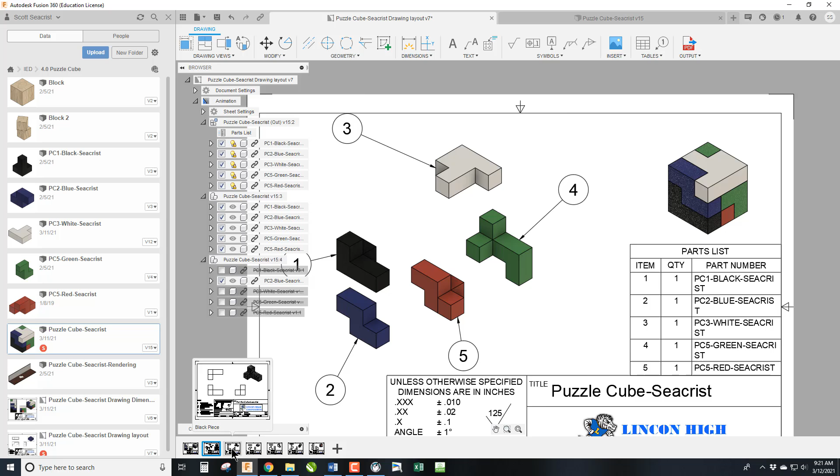Okay, welcome back. Today we're going to talk about how we take the assembled puzzle cube and lay out the drawings so that we can later dimension them. It's going to be epic. Stick around.

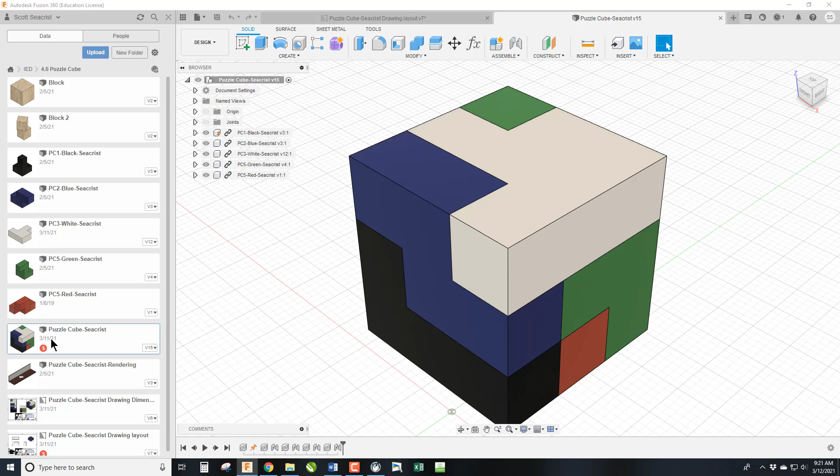Okay, we start with the model. First off, if we look at the data tree, you should have a puzzle cube assembled and a rendering one. You should not have multiple assembled puzzle cubes - if you do, delete them, but make sure you don't delete the one you did the animation in, since you'll need that. If you followed the animation tutorial, make sure you have a disassembly and an assembly video for when we use that in a drawing.

Hop back over to the design. We're going to create a drawing from design. We are going to choose a template, which in our case is the 8.5 by 11, and we'll click OK.

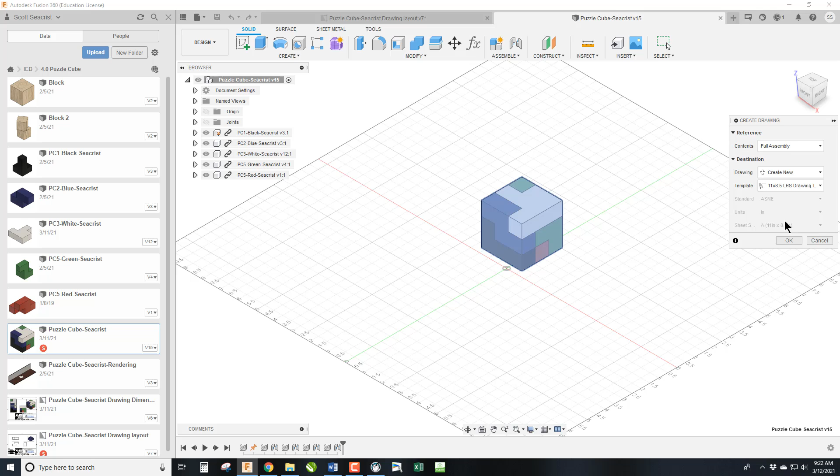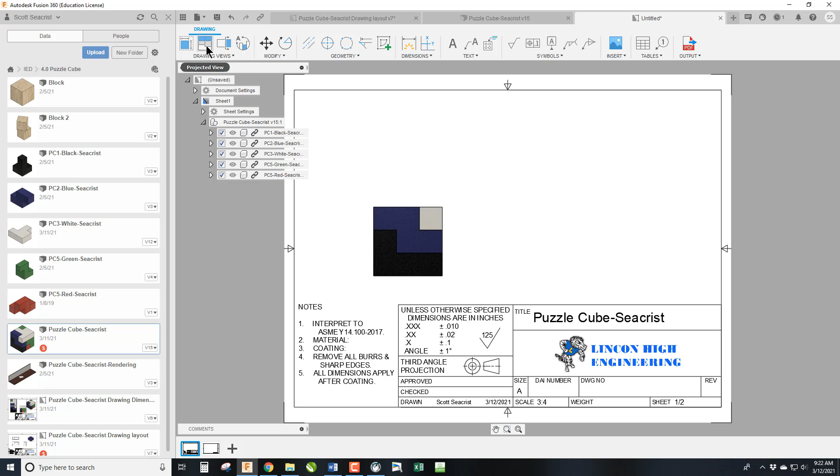We are going to first make sure this is colored. We're going to set the scale across all of this to 3/4 scale, so we have room for dimensions. We're going to place the front and click OK. We're then going to project the top, the right, and an isometric.

Now, the notes - we are going to need the notes in subsequent pages. If we delete them now, we'd have to rewrite them, so I wouldn't touch them.

Now we're going to jump over and fill out the title block. As always, make sure your caps lock is on. The code is IED for the class, so it's 200 for the puzzle cube, and since this is the first puzzle cube you've done, it's 1. If you did a super cube, this is where you'd put in 2. And then it is 00 because it's a cover page. Rev is the year, and this is the first version.

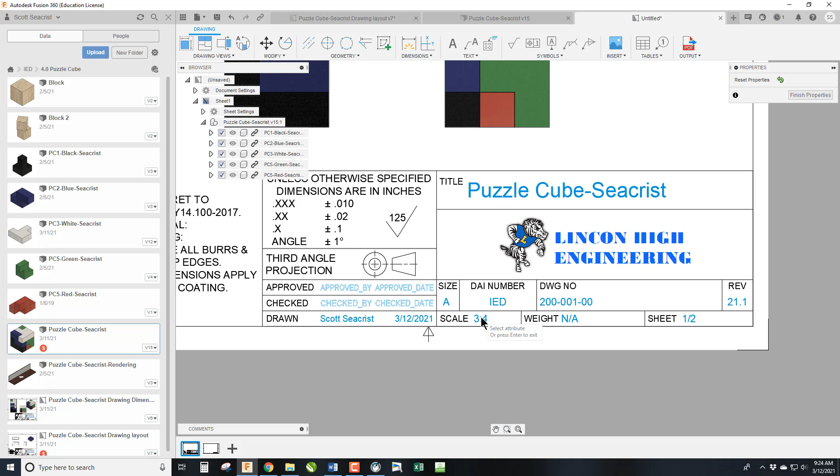We are going to leave the weight out because we don't need the weight of the assembly yet. And we have 3/4 scale. We are done for now with page 1.

So let's go next. Let's save it. We're going to call it Puzzle Cube Drawings Demo.

So we're going to hop back over to the assembly, and then switch to animation. The thing we want to make sure in animation is when it says top, front, right, that we have a view where we can see each piece clearly, not over the top of each other. If not, we could go down here and hit Edit Action and move them. That way, when we bring it into the drawing, this is the view we're going to get.

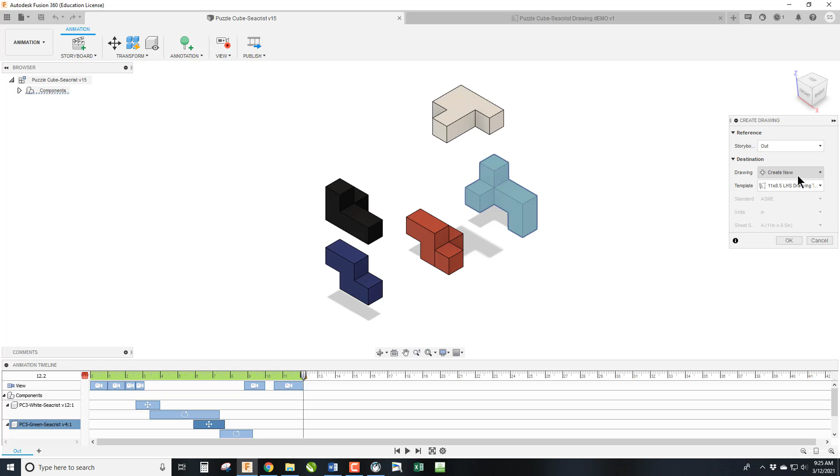So we're going to go to drawing from animation. We are now going to create it, put it on that demo drawing, and click OK. And we are then going to place that there.

Now I'm going to see if mine can get to 3:1 or 3/4 scale. Sometimes it can, sometimes it can't. I don't like that. I'm going to stick with half scale for this layout. So then we click OK. Oops, I should have turned on color before I clicked OK.

Now, the next thing we want to do is name our sheets. So we're going to call this sheet, by double-clicking on it, Animation. Hopefully I spelled that right. Nope, that doesn't look right. I don't think there's an extra A. Animation - there we go.

And we're going to label the first sheet, which we can do another way by right-clicking and saying rename. I'm going to call it Puzzle Cube. Now I have this sheet number 2, which I actually don't need, so I'm just going to hit delete.

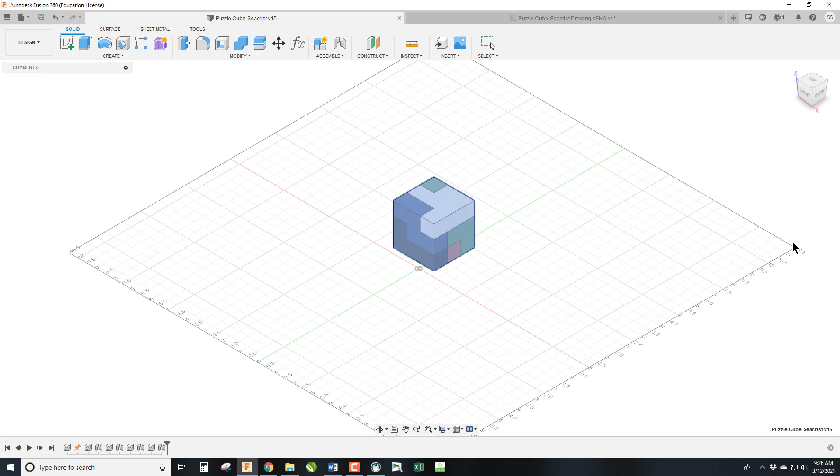So now I'm going to jump back over here. I'm going to go back into design, and then create a drawing from design. It is going to go onto this, but now we're going to put it on the animation sheet. So then we can choose the northwest quadrant, which is the same as the front right top.

And we can place an assembled cube in color here, so we have the disassembly and the assembly all visible. Now I've got to come down here and change this number to drawing number 1.

Finish. I don't need that notes on this one either. We'll need it on the next one.

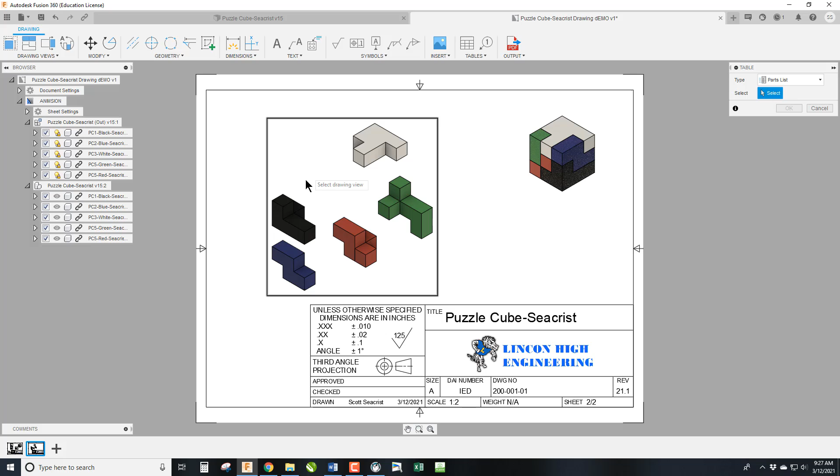Now we're going to go table, and we are going to insert a parts list. We have to choose which of these two views we want to put the parts list on. We want to do it on the animation. Then I'm going to anchor it in this bottom right-hand corner. Obviously it overlays over the top of this, so we're going to clean that up.

Notice I have some materials wrong. To clean that up, I'm going to double click on this. I'm going to take out the description and the materials because I'm going to put materials on each sheet, and I'm going to go from up to down, so it puts the title on top.

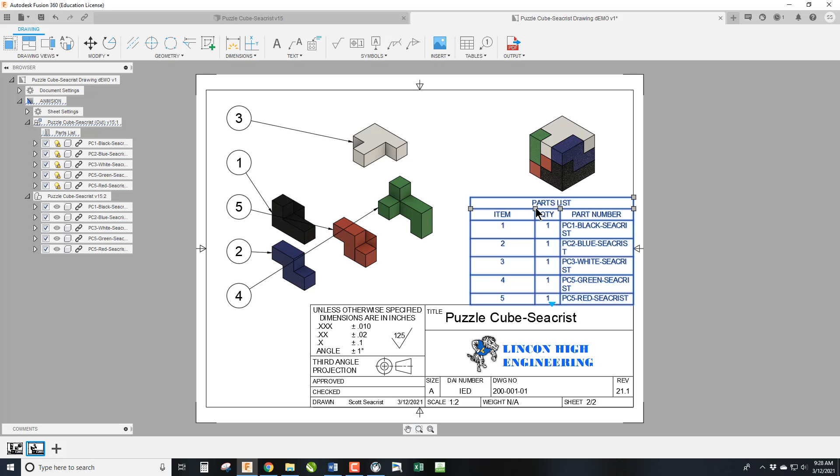I don't like that my titles are really long, so they're kind of crammed in there, it's cutting my name in half. So I'm going to come over here and pull this out, and pull this one over, and pull this one over. You'll notice that it then reduced the parts list.

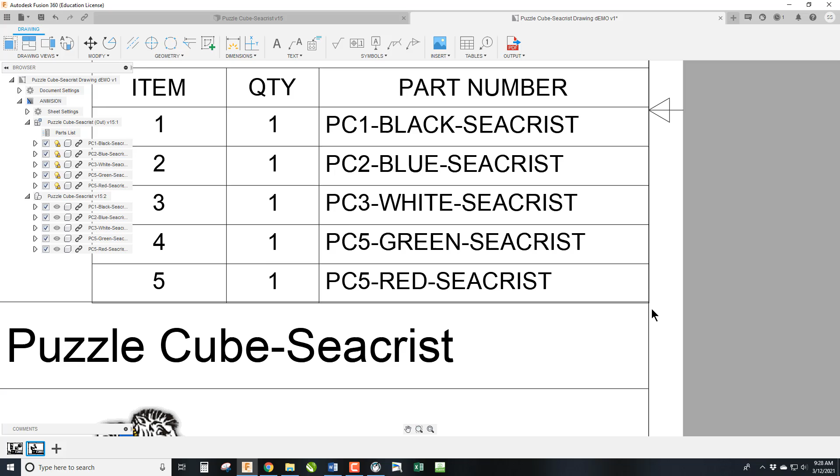So now it's a little bit tricky to get that back on there. If you zoom, zoom, zoom, you can do it. It's not snapping there, but that should be good enough. You're not going to be able to tell on a printed page that's not perfectly lined up.

Now the only thing we have to clean up is these numbers can't cross like they are here. You cannot make the number cross the part, and you also don't ever want to make it perfectly vertical or perfectly horizontal. It needs to be at some odd angle is the way you got to do it.

So I'm cleaning these up a little bit. Put the 5 over here and then bring this to this side. Now I'll maybe bring the 1 up to there so it's a little clearer.

Now it clearly shows each piece and its numbers. Obviously it's color coordinated, but if you dealt with somebody who's colorblind, they would still be able to tell which color each one would be.

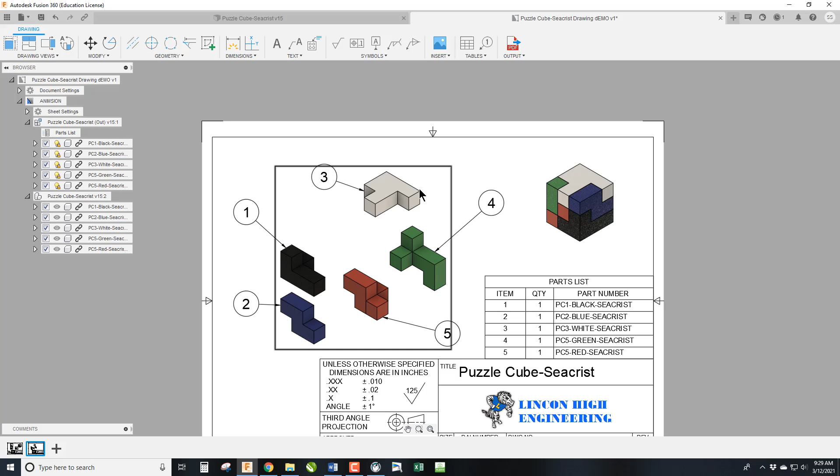So our parts list page is now done. We should hit save so we don't lose anything.

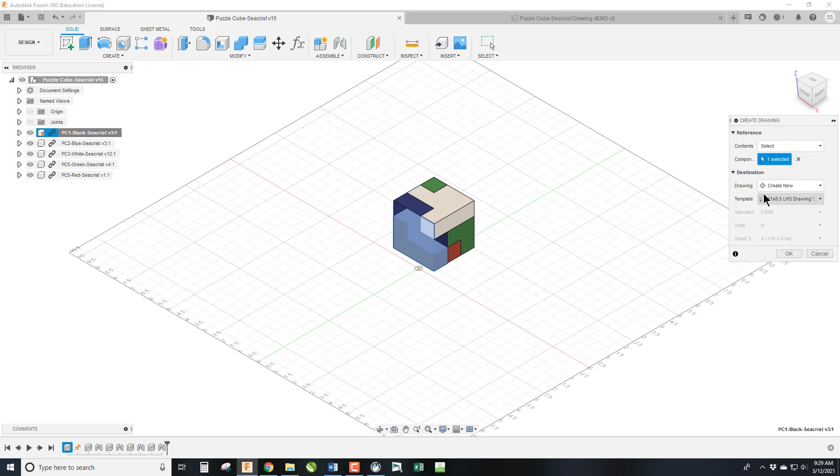Now we're going to go back to the model, and we are going to choose - I would just start at the top, the black piece - create a drawing. So I right-clicked on the black piece, create a drawing, and then we are going into this. It will be a new sheet. We click OK, and here is our front view.

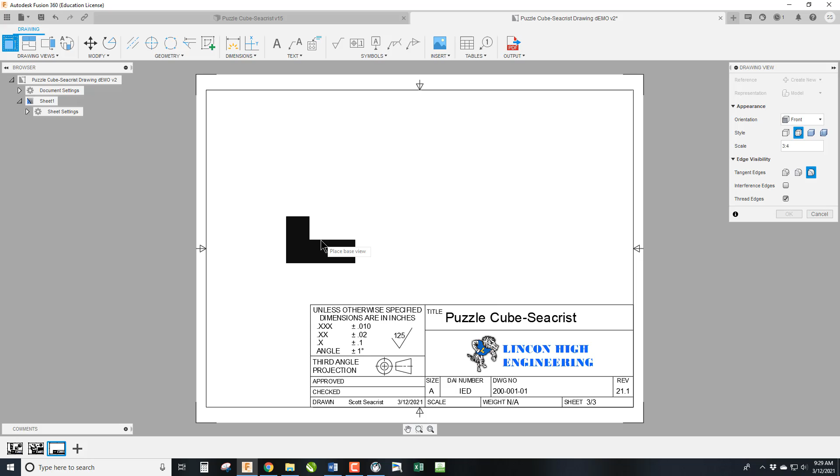Now, black is always, first thing I'm going to do is I'm going to turn on the 3/4 scale. Black is always challenging because I can't really see any of the other lines. So I'm just going to put it down here for now and click OK.

You'll notice that some hidden lines hit on the back side. So this is the front. If I roll it towards me, one face, then I will have a good front view and there won't be any hidden lines. So I'm going to double click on this and switch it from front to top. Now we have no hidden lines.

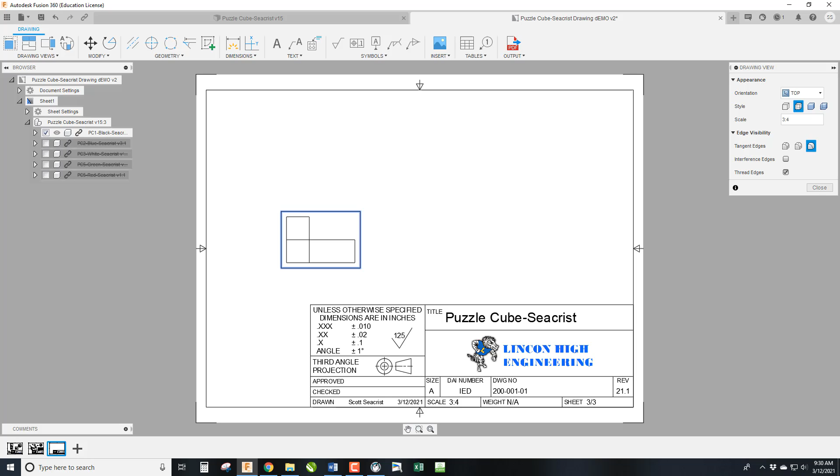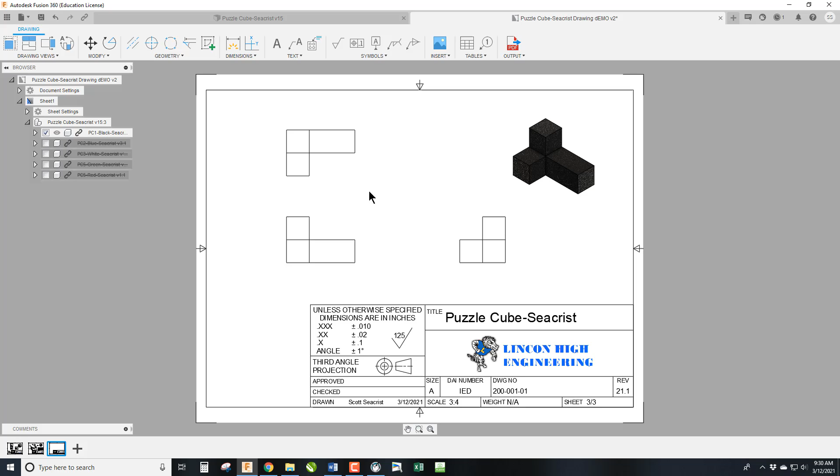And now we can go project up to the right at an ISO. Unfortunately, when we turn on the black, the ISO kind of doesn't really clearly show what we're doing. But we now have our page laid out appropriately with plenty of space to add dimensions. Later, there'll be another video on that.

We're going to change this to 2. Oops, helps if I hit enter.

Now I'm going to jump back over to the first model, and I'm going to hit Control Copy, Control C on my keyboard. Then I'm going to come over here and hit Control Paste. Now it wants me to move it, but I want it to be right there, so I could just kind of quickly move it and come back.

Now we can edit this. This is made out of hardwood, and the coating is Sharpie, and it's black. So when you make it, you color it black, as you guys all did in class when we glued them together. So we hit close.

We had a little problem that it returned down, so I'm going to pull that off. So this one is done. I would label this the black piece.

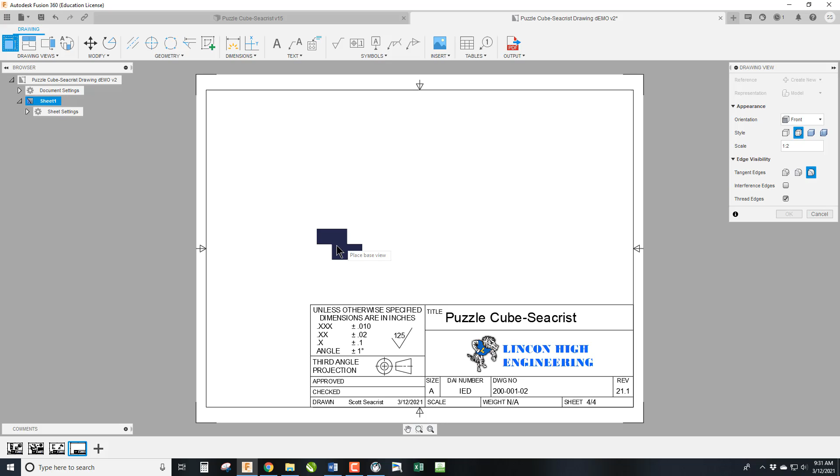And then I would go back, and I find it logical just to march right down, create a drawing here. Click OK, and that's a perfectly acceptable front view. So let's first turn this to 3 to 4. Let's place it, click OK.

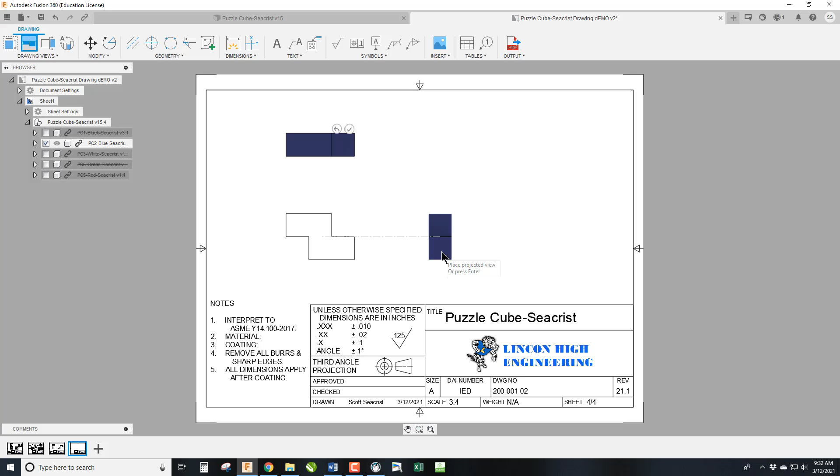We can click here right now and hit Control V and place that there and click OK, and then project. This is all just going to be repetitive going along. Double click to turn on the color, close, double click down here, and hardwood. Now if I was smart, Sharpie blue, I would then click close and I would hit Control C to copy it again. So now I only have to change the color. And this one would become the blue piece.

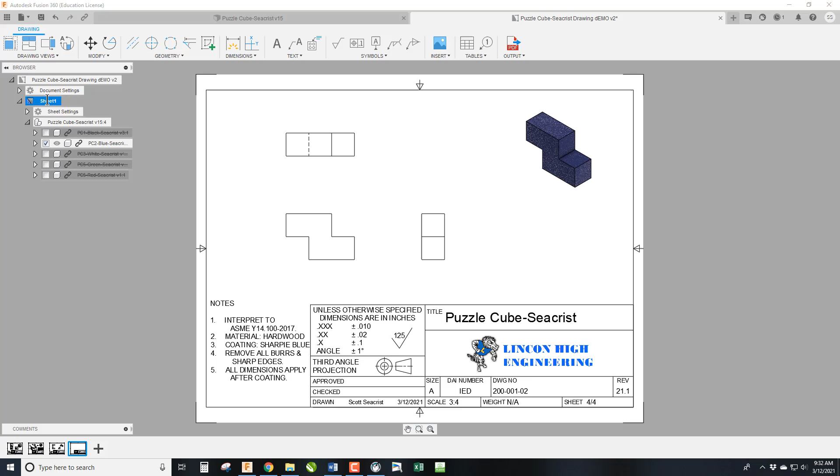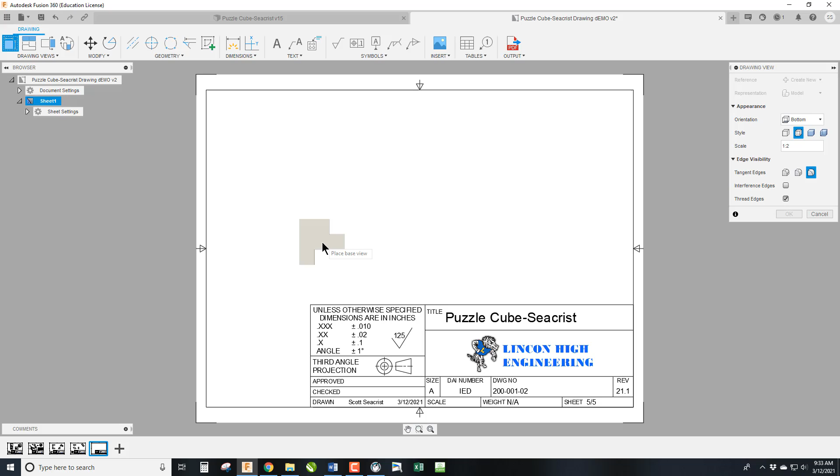And back to the model, we're going to go down to the white, which in our case we'll call raw because we don't put a color on it. Now, I think the top, that's going to be the view I want, but actually not the top. We're going to do the bottom. So that's the view I want, but not in that orientation. So once again, I'm going to change this to 3 to 4. And I'm going to place it here and go OK.

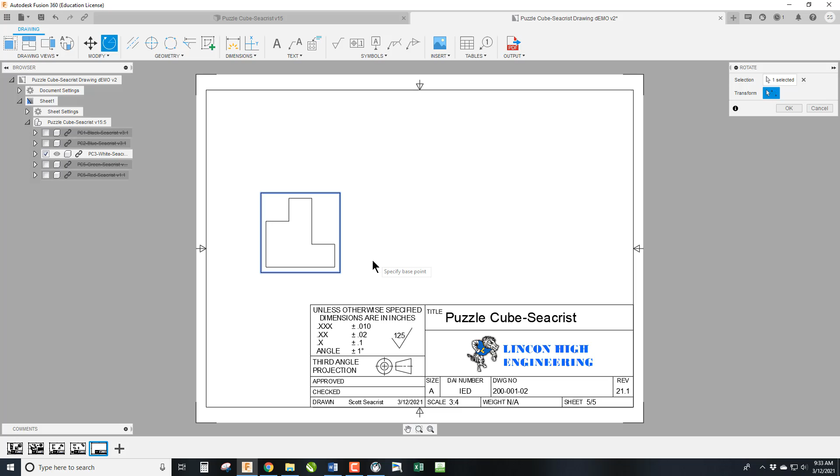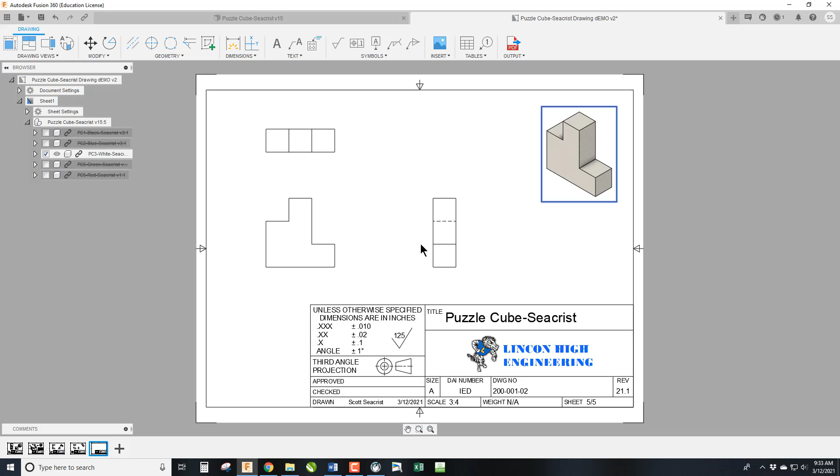Now I'm going to use rotate to grab this piece and just pick a transition point, and I'm going to rotate it 90 degrees. There we go. Now I have a good view. And why did I rotate it? I rotated it because in this view, when I project the top and the right and an ISO, I will only end up with one hidden line on the right side view. If I had done it the other way, you would have ended up with hidden lines on both the top and the right. I can come over here and hit Control V to paste.

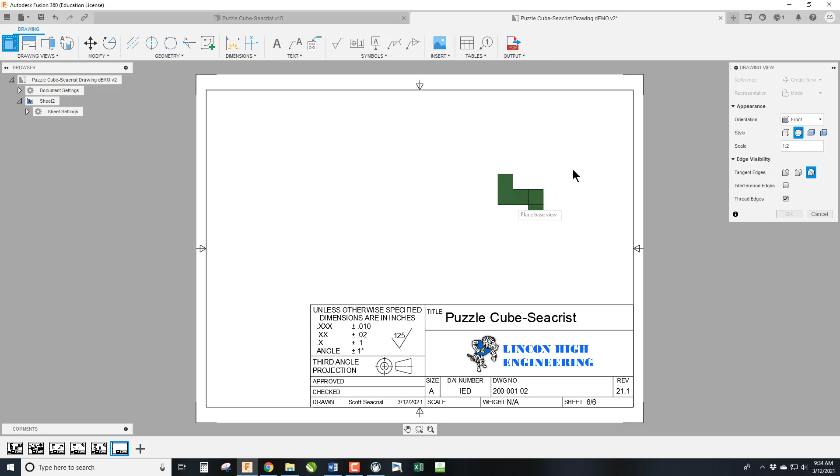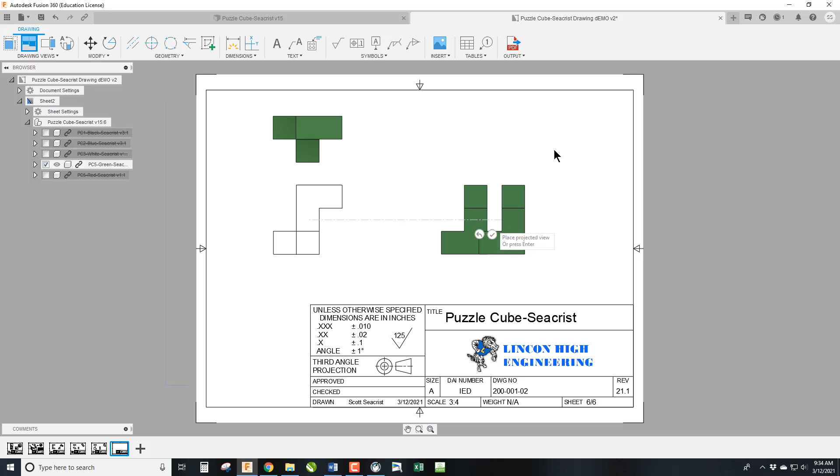And then I can take out the blue, the coating, and we're going to leave this raw. There we go. And we'll hop back over and do the last two quickly. Once again, not the best front view, so I'm going to click here. I'm going to make it a 3:4. I am going to rotate this one as well. And then I will project up to the right and into an ISO. And then, of course, turn on the ISO.

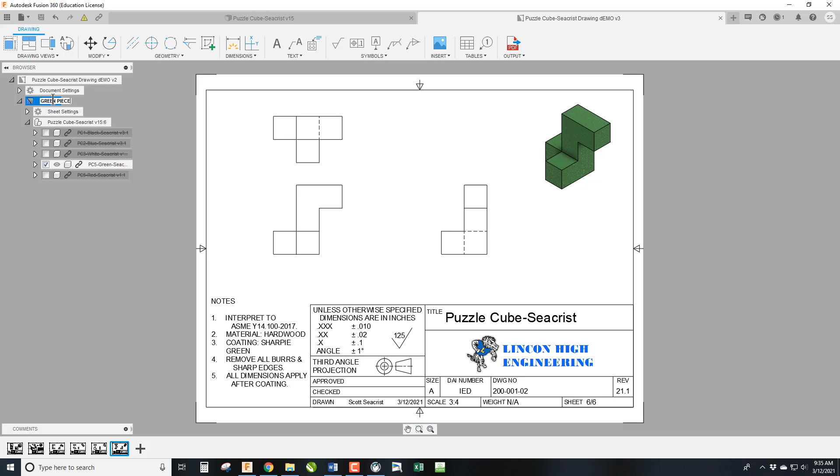Come over here, paste again, double click. Type in green. Pull this down so we get the coating over there. Hit save. And this one should be the green piece. I think I forgot the first one. Or the white one, I would have put raw or white piece. And then our last one would be to jump over, and I believe it's the red piece.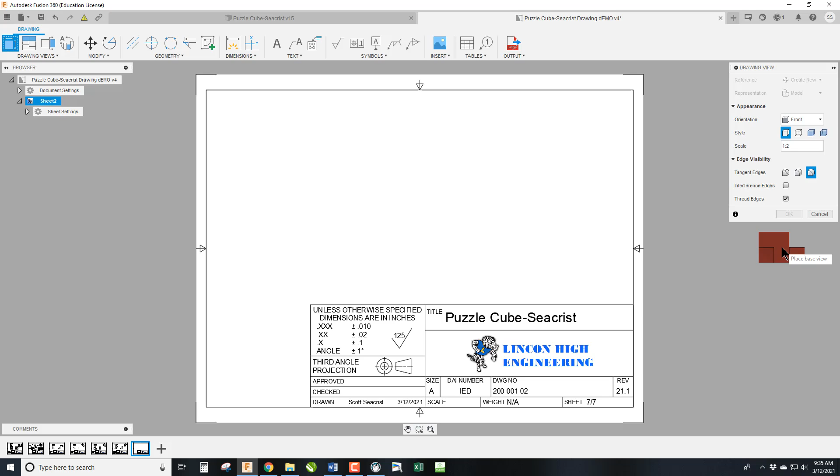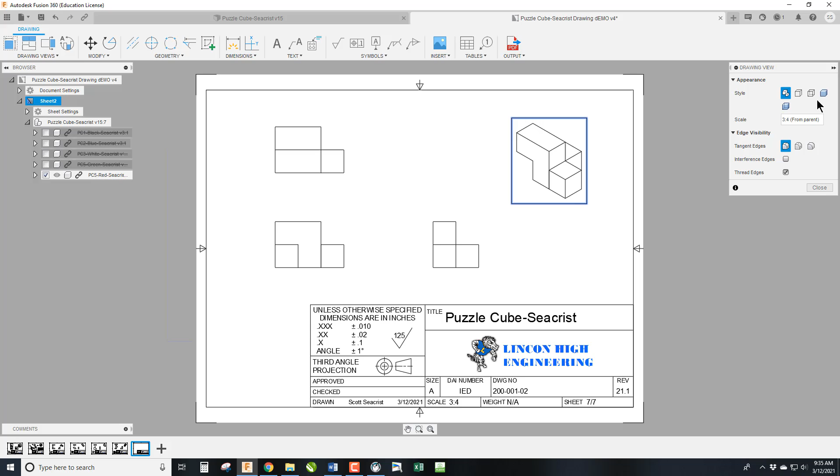I'm actually going to use that front view. This one's a challenging one because there's a lot of possible front views. But I think this will produce a few hidden lines, but not a ton. It gives a clear view in the ISO, which is what I'm going for. Okay. This one should show hidden lines. This one won't have any hidden lines. We can place this here. We can click on OK, and we can change blue to red and close.

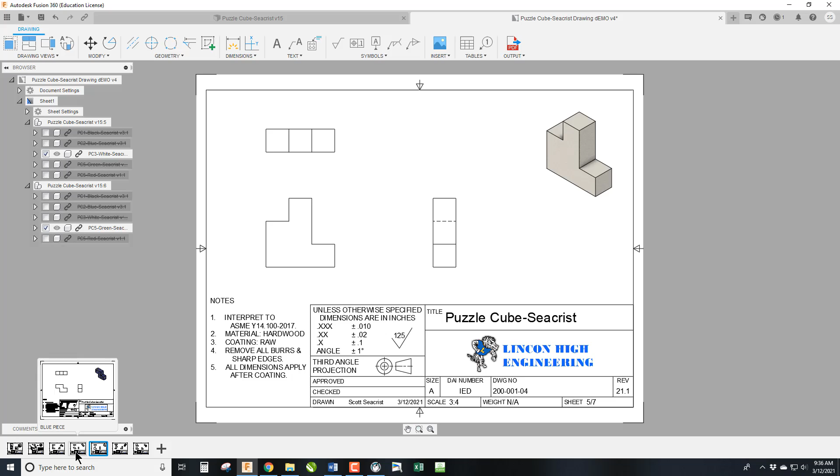And now, oh, I forgot to update these. These should have been coming along. 1, 2, 3, 4, 5. So this should be page or drawing number 6. Finish. This one should be drawing number 5. Obviously, drawing number 4. And drawing number 3. And because I started with 2, I'm guessing that this one is done correctly.

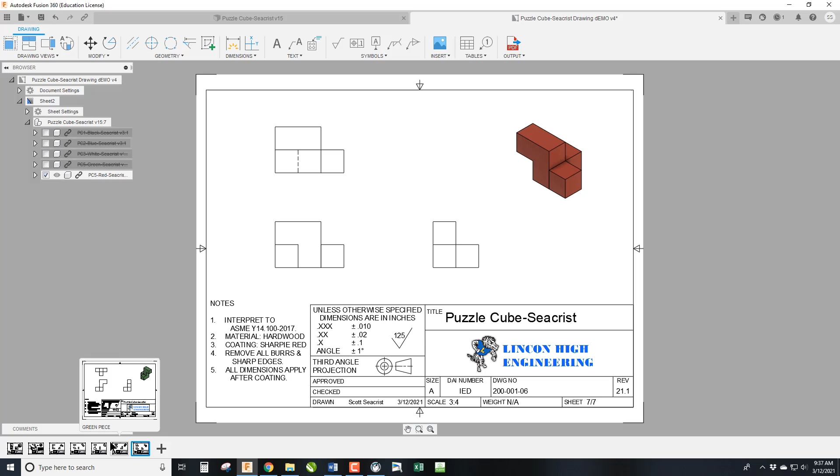So we now have a fully complete drawing ready to move into the dimensioning phase. So we have all 6 sheets laid out. If you're in my class and you're doing a supercube, you would need to do another drawing packet, but it would have the assembled supercube, the parts list supercube, and the only other piece you needed to make the supercube. So you don't have to redo the 4 pieces that are shared between the regular cube and the supercube.